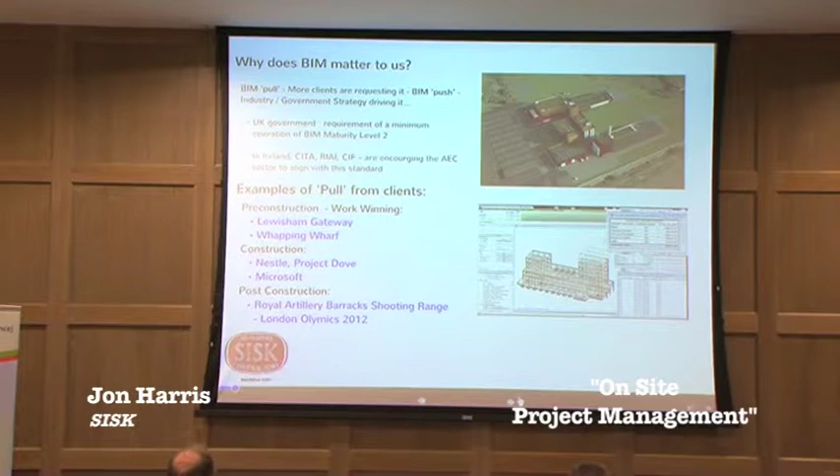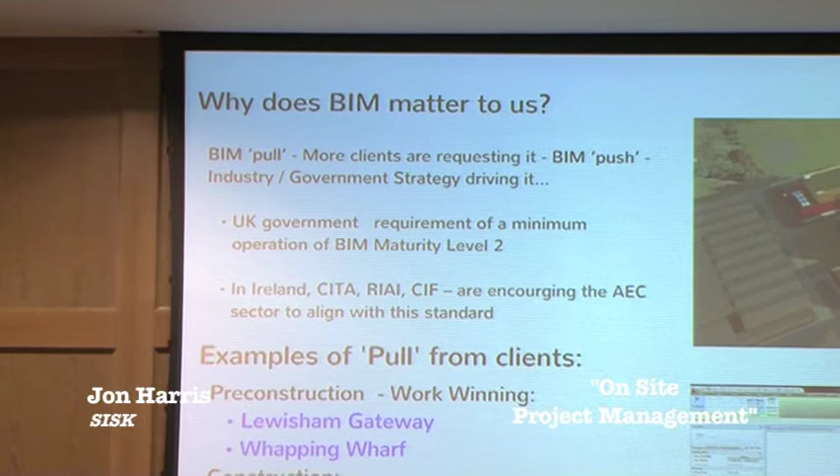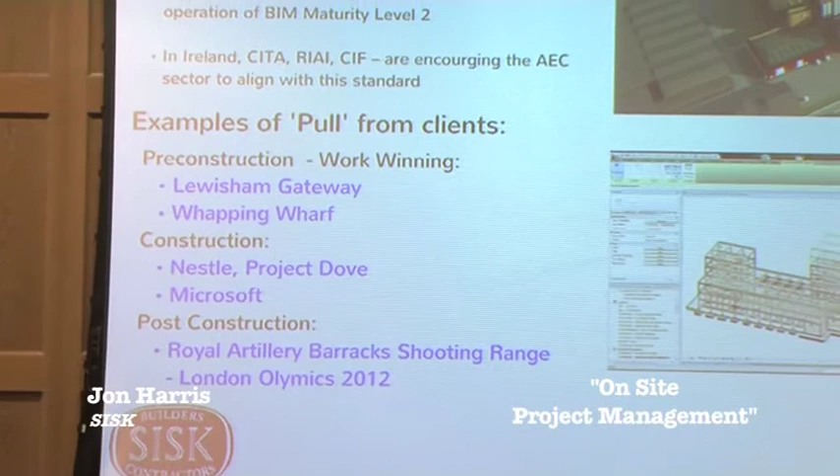So what does it actually matter to us? Andrew has talked about the push-pull, certainly in the UK. We're seeing a lot of push from the government about being at a BIM maturity level 2. There are huge advantages from that point of view, but from our point of view, we're also getting it from clients that are expecting it. From a contractor's point of view, BIM is actually a process that boosts efficiency and value, and that's what we're looking for.

Money's tight, tenders are difficult, so we're going to focus on some projects here, certainly from a pre-construction point of view, which we've won in the last couple of weeks, so they're fairly fresh, through to some that are actually running at the moment. They're both big BIM and little BIM, so it's looking at different sizes. It's quite useful to look at that.

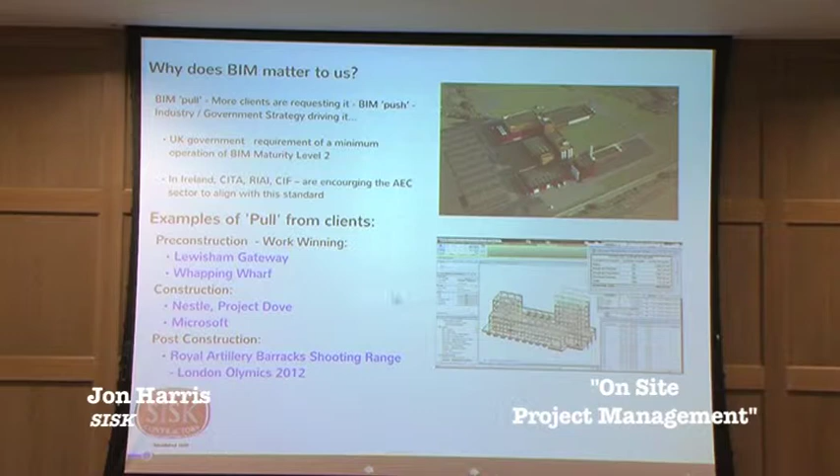And then looking right at the end, you'll probably recognise it - the Olympics, where we did temporary buildings, and BIM was actually used on that building. So if I ask John to look at this.

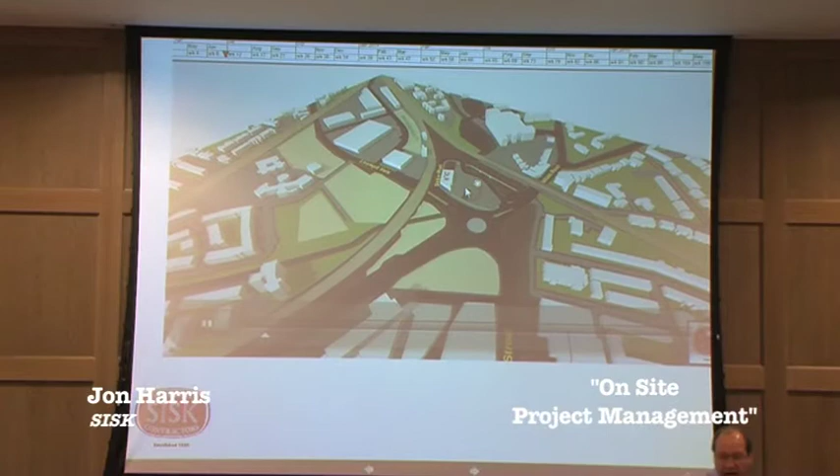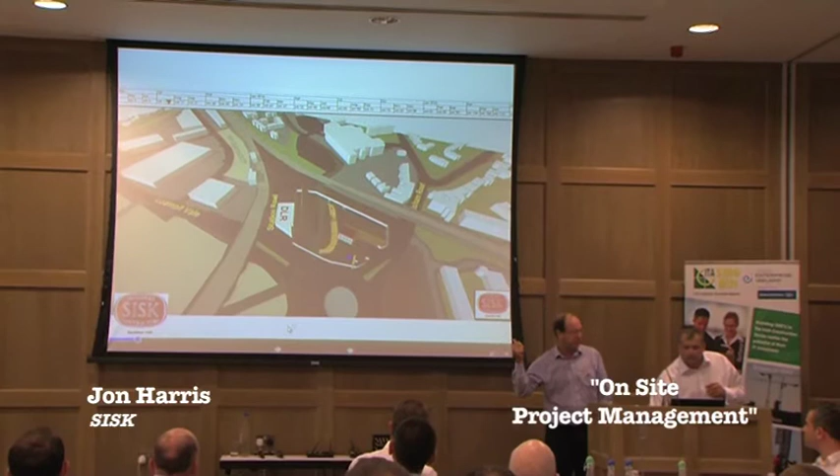This is a project we recently tendered on, and we used Synchro. I'm talking more from the 4D perspective here than anything else. If we didn't have Synchro, we probably wouldn't have got this job. It enabled us to see things which we wouldn't have normally picked up. What you're seeing here is a CGI graphic developed from Synchro, tied into our program. We were able to adapt our program. There's some quite intricate enabling works, which for a builder, we would normally not have seen.

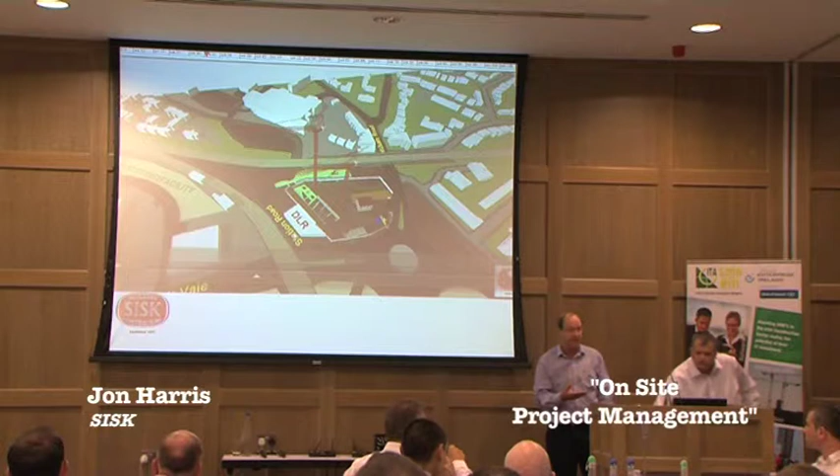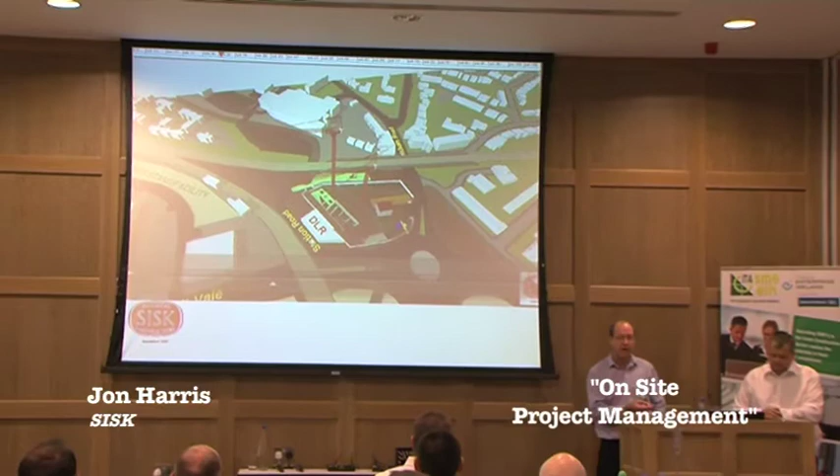River diversions - just having the facility of Synchro there. If you stop there, you can see to the right of the building there are two rivers that needed to be diverted. Synchro enabled us to look at that, to resequence, to rephase, and to recast. On top of that, it also enabled us to demonstrate to the client and give the client confidence in knowing how we were going about it. The Environment Agency was a key factor in this - this is in the middle of London. Again, these tools, Synchro, gave us the ability to take it that step forward.

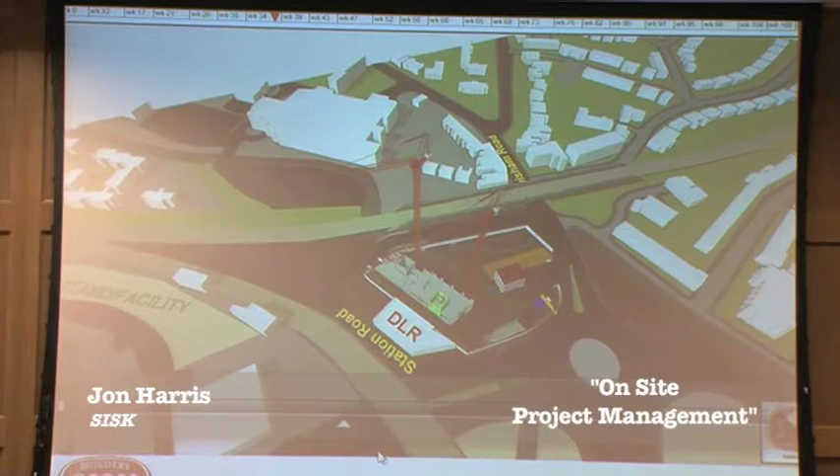I don't think we need to go into more on that. It's part of the first phase, which was won in the last couple of weeks or so. So it's about work winning.

Also, the thing I quite like about Synchro is it dynamically links to the model. If the model's available at that stage, fantastic. Sometimes it is available, and in this particular case we could use the structural model, taking it from the consultant and developing it further. You need to add to it things like site setup, site welfare, logistics phasing, and those sorts of things. So it's a very good tool. But the good thing about it is it's not throwaway, not just a pretty animation - it dynamically links to your scheduling software, so it'll link to Primavera, and to the standard tools we tend to use, which is Asta Powerproject. So it's a very good tool, and it links against a timeline.

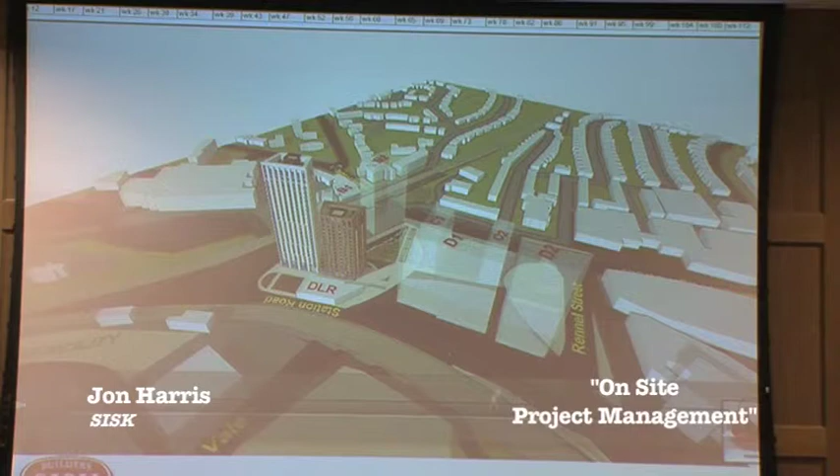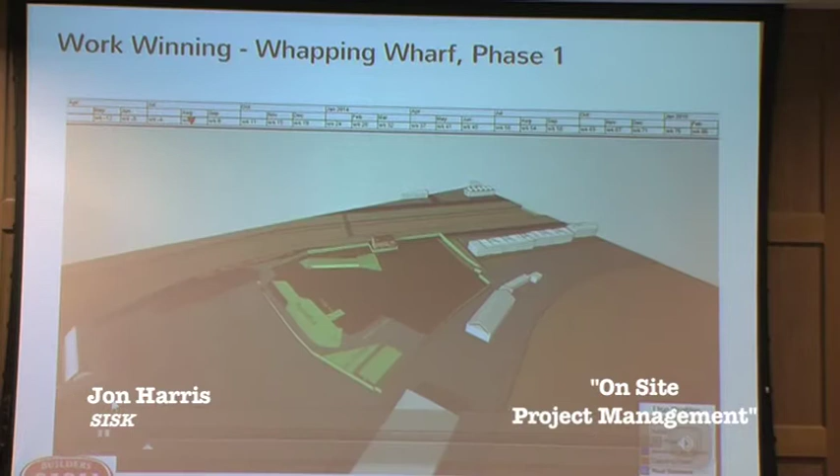Moving on from that, I'll move on to another project we've literally just won. This particular project is in Bristol, in the UK. It's a mixed housing development, 204 apartments. Again, at the tender stage, to help us win the project, we produced a lot of site visits to actually understand the actual site setup. Just stopping it there.

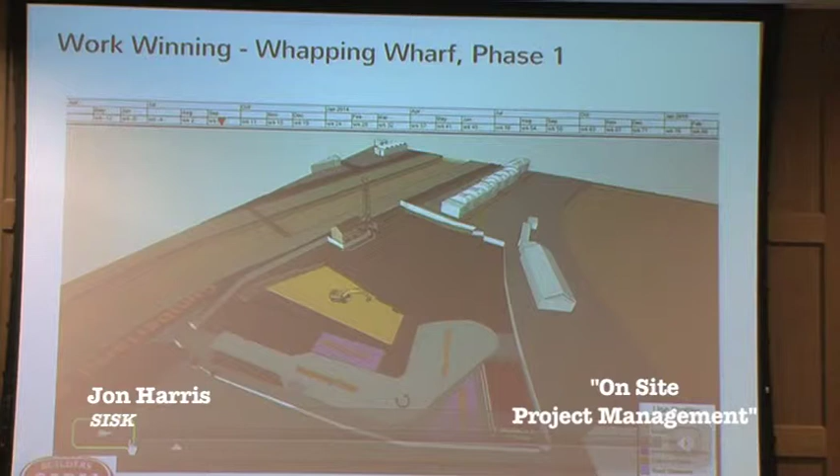We needed to actually understand the egress, being in the centre of the city, and the lots of problems from a delivery point of view, understanding third party. If you look, I need to maybe use a laser, I think.

Both on these sides here, this little bit here is actually known as the Cut, which was a man-made river. It was built in 1804 to 1809. And this is actually a floating harbour. There's also a railway that runs along here.

So from a site investigation point of view, lots of issues around third parties, around boundaries, about logistics. So we needed to be able to actually play that back, which enabled us to understand the movement from here.

There's a bridge that's used quite a lot here from a pedestrian point of view, and this is very, very active - it was an existing car park. This is a museum along the side here, but also things like plant and cranage from a site setup. There is actually quite a nice story about that Cut.

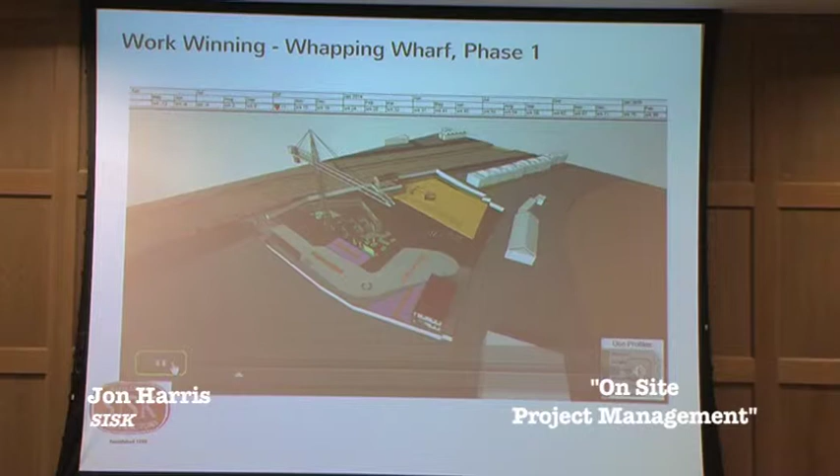It was built in 1804 to 1809, took about 5 years to build, 3.5 miles, built by Irish navvies and English navvies. And they actually had a party when they finished it.

They actually had, I think it was 2 oxen and loads of potatoes and 600 weight of plum pudding. But also every man had a gallon of beer, strong beer. But what actually happened is the beer ran out and it ended up in a punch-up.

So then the press gang came in and had to sort them out. But we actually use this, and it's much more simplistic - it's not like CGI, it's a simplistic, more cartoonish model, but we can simulate what's being built, what's being demolished, the actual site setup, the site welfare, the boundaries, and traffic movement and so forth. It's a very, very useful tool that we actually use.

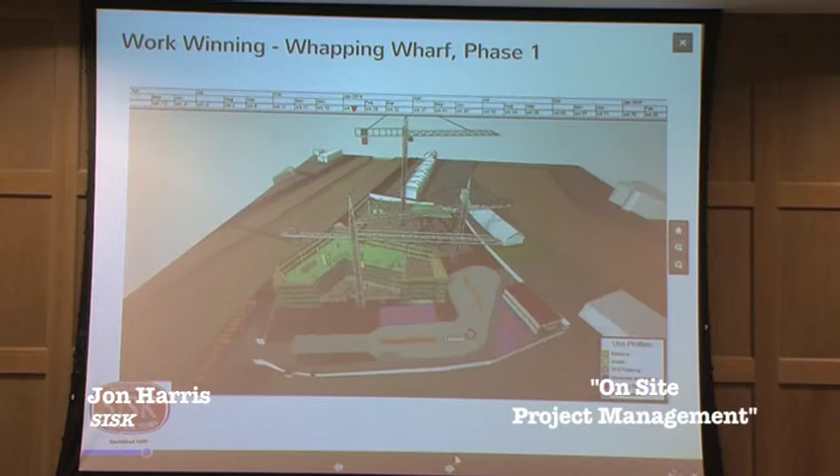Moving on to another project, again at a tender stage. I'll just zoom into this little bit. Excuse me, moving around a little bit. This is a CGI. This is Nestle.

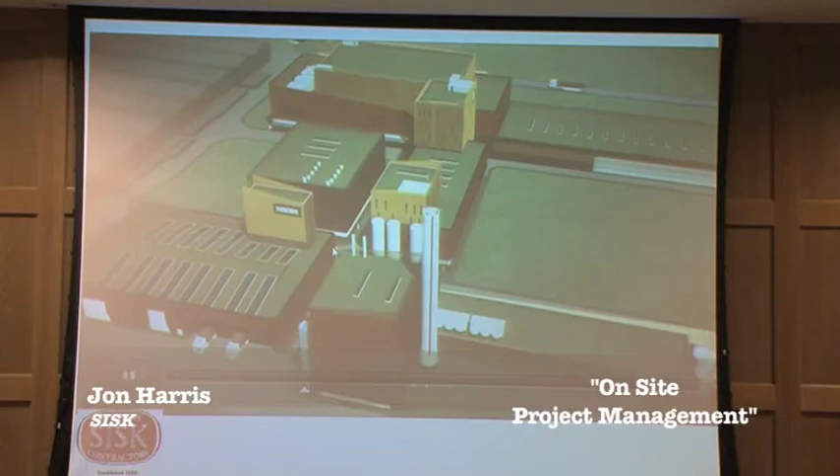It's probably one of their largest projects. They've got a £500 million framework. This is £250 million worth of it - 16 different buildings, both industrial, process design. It's a big extension to an existing factory that's been there for 100 years.

Now, when we first rolled up, great, fantastic, everybody's engaged, but it's a different type - it does depend on your procurement routes. In this particular case, it was a 2-stage traditional tender. The design team were not novated to us, but we had 16 different packages that we, as a contractor, needed to control the design.

And they were using just an FTP site to collaborate this information. Great, the fact that they were doing things in 3D. But right from the word go, we actually used BIM from a concept stage.

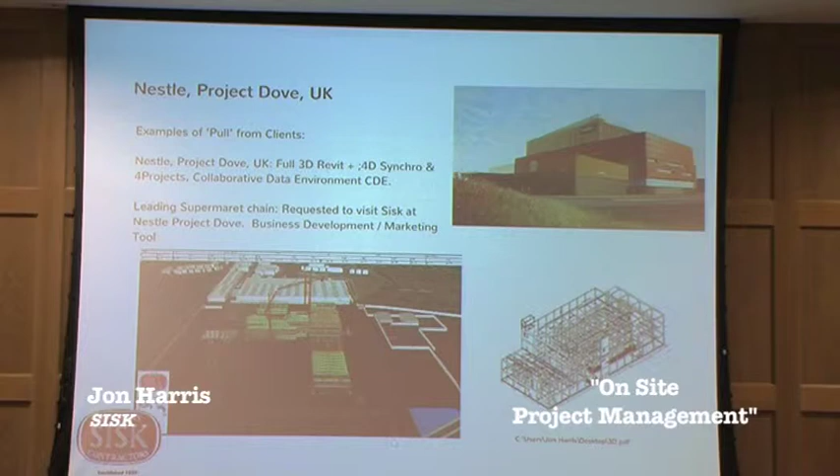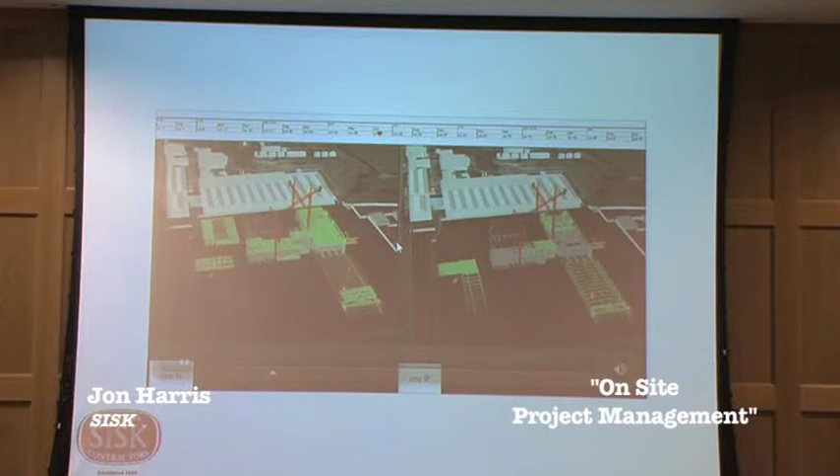Great, fantastic - Andy's talked about using programs and so forth. What we actually use on site is to compare the contract program that we've agreed against where we are from a design point of view. So we might be held up from a design point of view, but the client constantly changed.

Since we started, in September last year, 1,200 changes - constantly changing all the time. So very, very complex, and you need to be able to manage that.

You don't necessarily want to sit there as a contractor and say, thank you very much, new variation can I have please, because that's really not the right sort of approach. You want to be looking at value engineering, you want to be looking at giving the best value and efficiency.

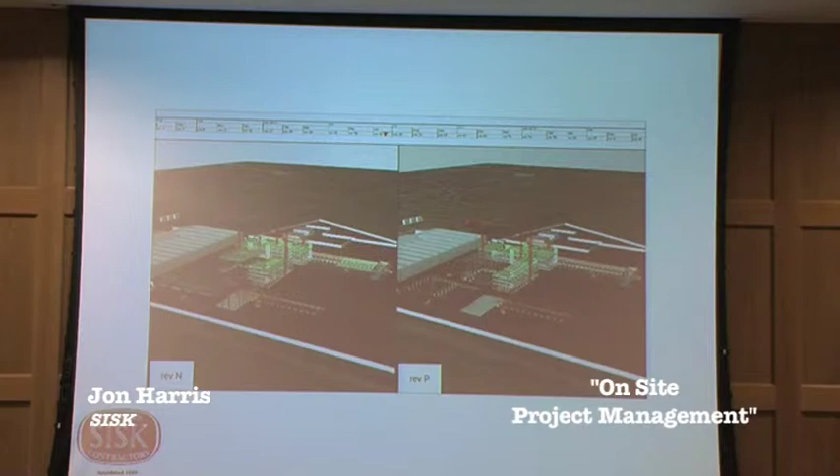But we can actually take certain parts, focus on them, and it's dynamically linked to the program. So the program controls the thing - it's not done in isolation, it controls the design, so you end up with a design, procure, and construct program. Even though the designers are not novated to us, they're all working in BIM.

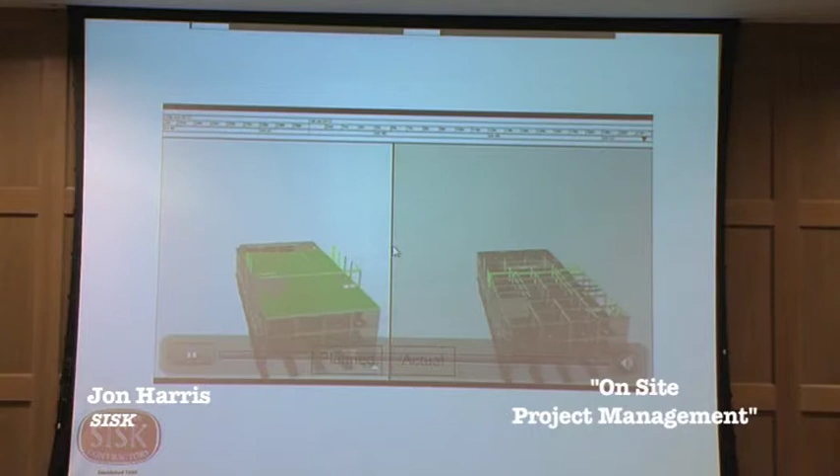And I think having to set up, where they were using an FTP site, sharing of information is very important, and collaboration is very important. But this is a very good tool to show, well, that's where we're meant to be, and here is actually where we are.

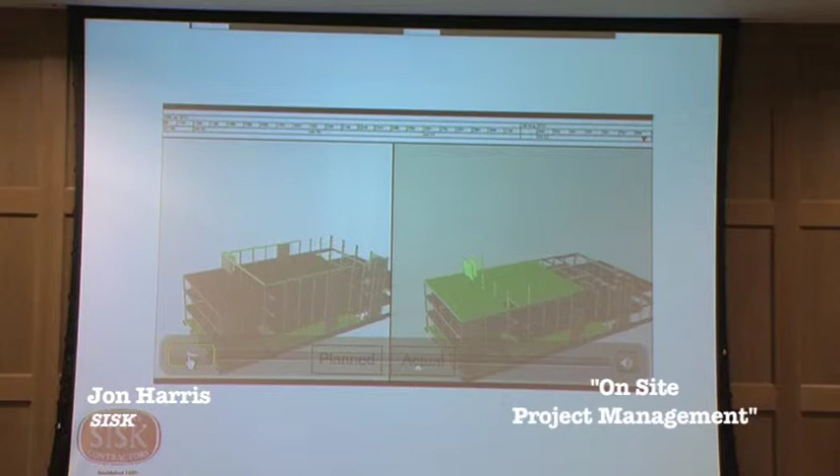Because the design has been held up, or there's all these changes, you now decided to move this piece of plant. Very complicated because you've got 16 different teams, but they're worldwide. Russia, Sweden, Switzerland, all different places.

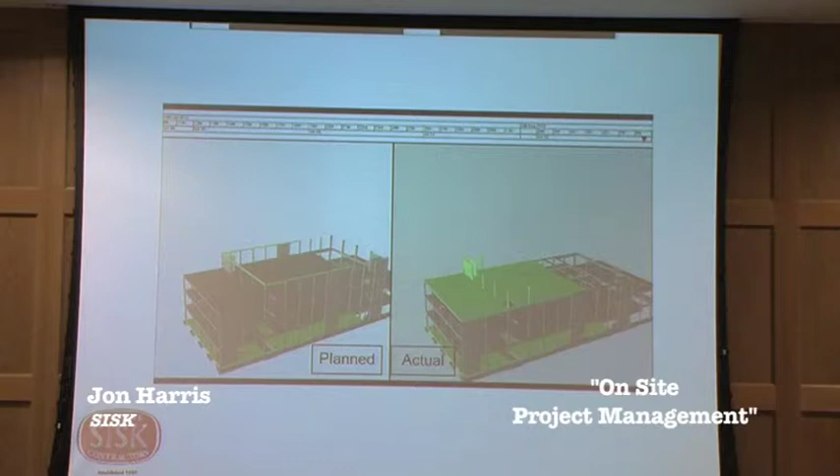So one thing that we actually brought to the table, we think, when we've actually set this up, from a global point of view, from an enterprise, is we actually believe in having a collaborative project.

So to help that, I suppose it's the olive leaf, we'll actually train the whole team, at a cost to ourselves, to train the designers.

A lot of designers are used to these tools. They use all different sorts, whether it's Asite, whether it's Buzzsaw, but we actually offer this as a value proposition to say we can host this information, we can share this information, so we end up with simplified communication.

One version of the truth, we say automatic compliance, somewhere in an online collaborative environment, which is quite important around things like PAS 1192 and those sorts of things, to actually have somewhere where you control that information so that you're working to the right information at the right time.

One thing that we did as well around change control, which you need to keep on top of, because 1,200 different changes, it's complicated. The original process, they actually had just this sort of flow chart that if there's a change, this is what they do.

It's a sort of paper chase. You need to be able to actually look at that. They have a standard form, they have their processes, they don't want to move away from it, but they would fill in a form, they would do it manually.

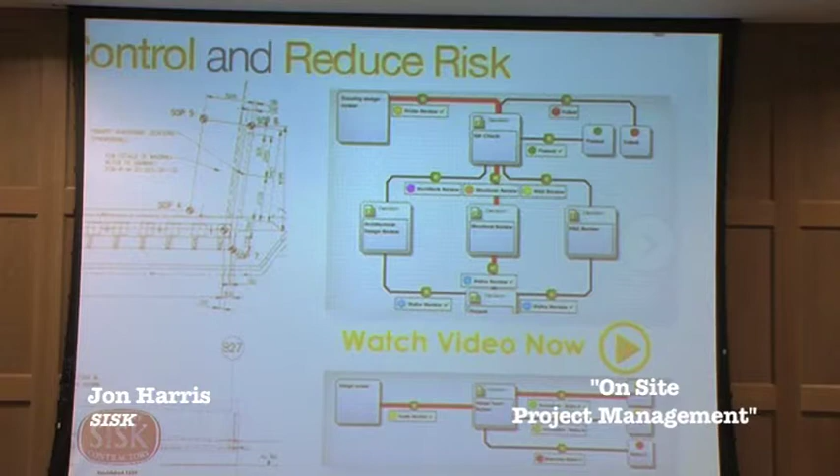So advancements of moving from an FTP site to a collaborative environment.

The other things as well, we talked about sort of, Andy was talking about mobile technology. Yes, smartphones, people do a lot of things on smartphones and tablets and things like that out in the field itself.

Certainly, we want to be in a position where we can actually go out and see that information in real time. Mobile technology is improving all the time, but the ability to actually go out, visualize that information.

Maybe send an RFI, or take a snapshot, a photo if I'm doing snagging or something, and it goes in, it will create an automatic audit and send it to the right sort of people. So you speed up that efficiency and that process.

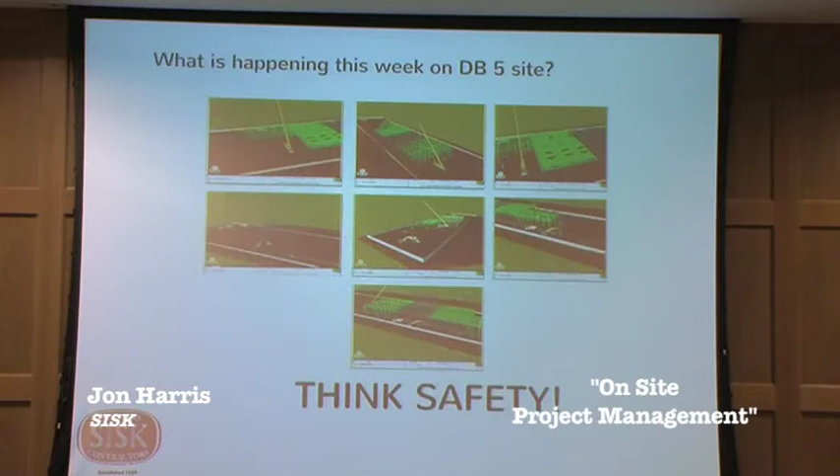Not enough time to really go into this, but this is something else we're looking at from an O&M perspective. There's a request for the BIM model at the end, but what is that? Is it a collection of information, one big Revit model, IFCs, something based around COBie? I think that's evolving, but it's a collection of information associated with the project. If you look at PAS 1192, you need to understand the employer's information requirements and set that early in a BIM execution plan to get you where you need to get to. I think John's going to talk about this one.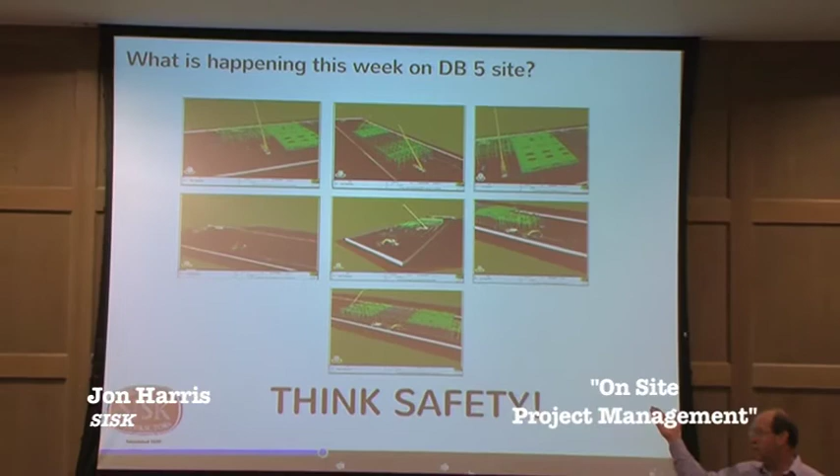Making use of the tools available using Synchro, on this particular project we take the contractors on a weekly basis and run them through the look ahead for the week. We look out for items where we're going to have potential clashes, where plant is going to be running, so people are well aware of it. These are tools we probably never had before, which can be shown graphically to people on site, giving a major benefit from a health and safety perspective.

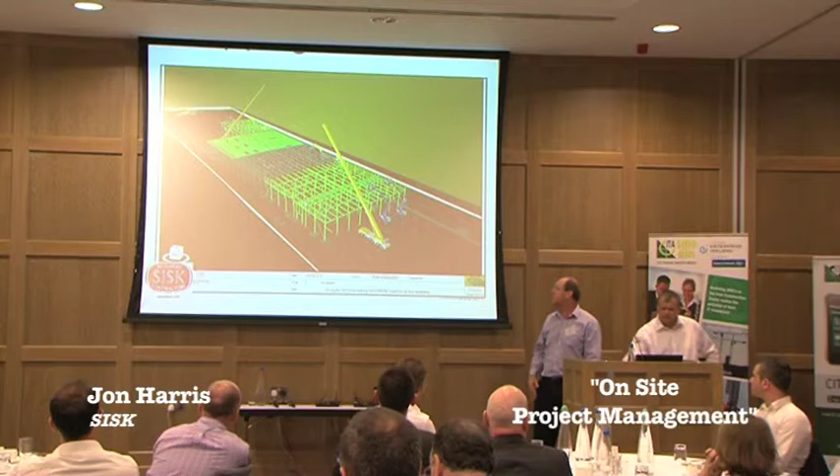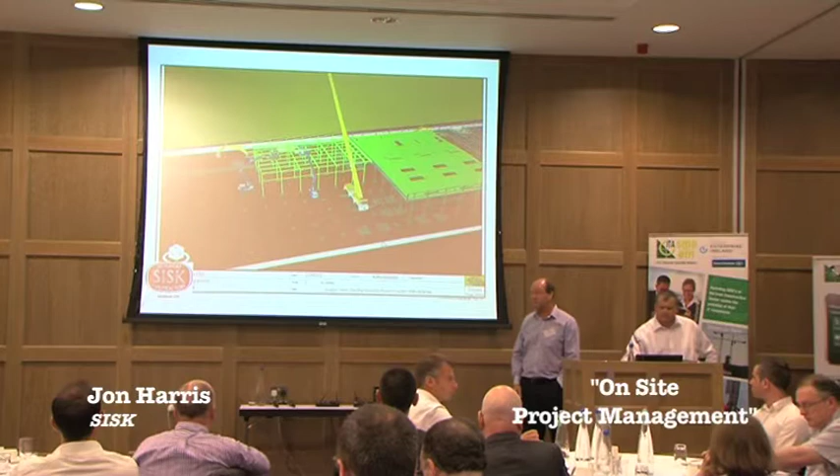This is probably something John has touched on as well, Andrew - running through look-aheads in your work programming, location of cranes, how different contractors are going to be interfacing with each other. These tools are now available using Synchro in this instance, which were never really available before.

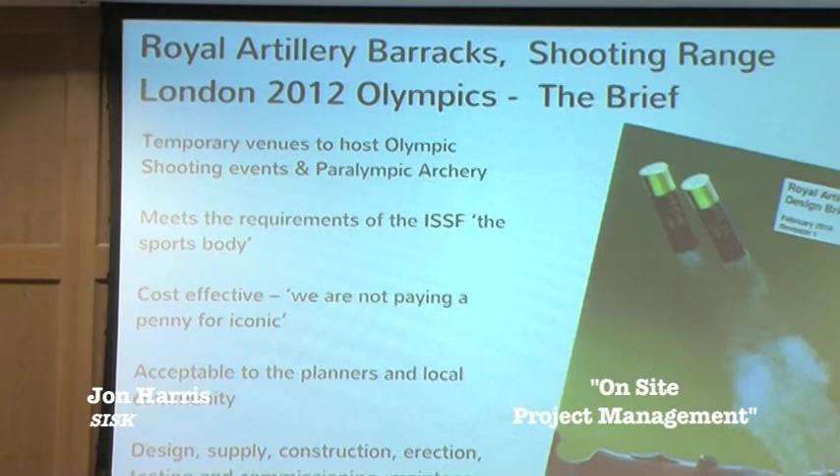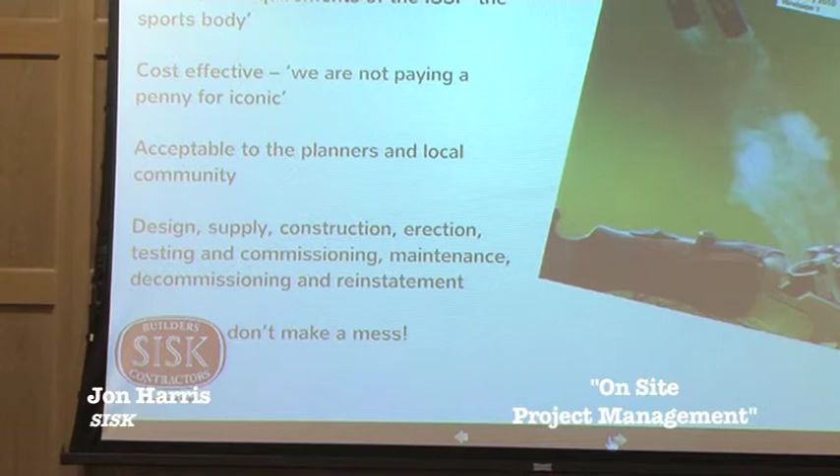So, to sum up, I'll end on a project where we were the main contractor. This is quite a unique one, iconic, but not iconic, because the client didn't want it to be iconic - they didn't want to spend the money. They wanted something cost effective. This was the Royal Artillery Barracks, the shooting range where they did rifle, shotgun, pistol shooting, archery for the Paralympics. They didn't want to pay a penny for iconic, but the rules around this were to minimise the use of virgin materials, reuse, recycle at the end, and reinstate back to a greenfield site in a cost-effective way - a bit unusual. Don't make a mess, that's where they were coming from as a client, from an ODA point of view. I thought the consultants on this job were absolutely fantastic.

Mott MacDonald, the architect was Magma, and it was based around almost like the sort of military heritage around bivouac and tents in a field as the approach.

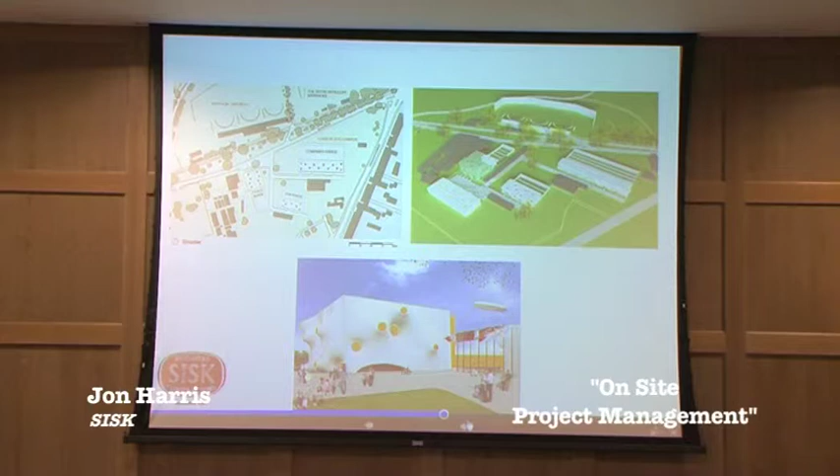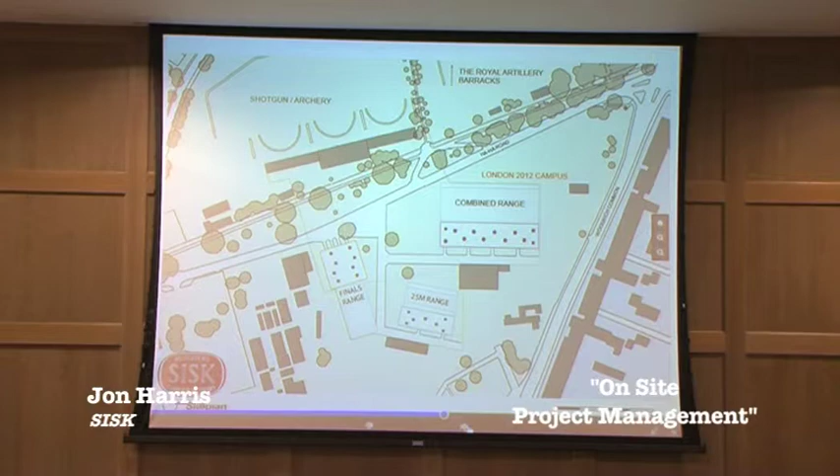Then focusing on value for money - originally you had 4 buildings, and the design team took those 4 buildings and said we don't need this, let's reduce the footprint. They amalgamated 2 of the 4 into one building and reduced the footprint by 25%, which means 25% less cost, less materials and so forth. They ended up with a solution based on 3 main parts of the building.

Looking at a few of the buildings - quite unusual, temporary structure. They tried to use standard trusses, standard columns. The only bespoke part of this was some of the connections in the corners. In fact, the structure used here was actually used by Madonna afterwards in one of her concerts - or before that, actually, before that.

Moving on from this, looking at what they call the Olympic rings - they had a multi-purpose role. Their purpose was to tension the outside fabric. The fabric was PVC, again recyclable, with good durability, good tensile strength, good thermal properties. It was also about creating no flat spots, so rain wouldn't catch and pool.

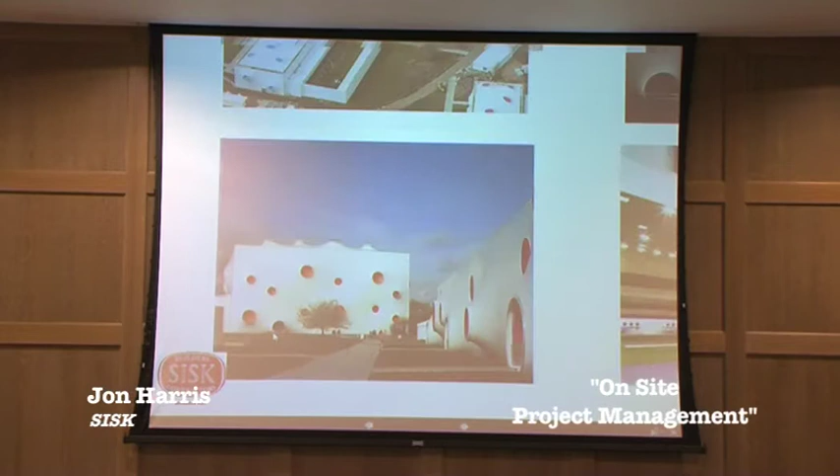I think this is probably a better picture. So you wouldn't get those sort of flat spots to collect rain, but also the flapping sounds that you get, maybe distracting when you don't want that happening if somebody's shooting a rifle, I suppose.

But also, you know, natural ventilation, the typical sort of stack effect - we're trying to use that. It was double skinned, so we could use that double skin to actually run services and cables through, which was quite useful.

And also inside, they looked at the ballistics, which is quite interesting - a simple use of plywood, so you can see these sort of baffle-shaped things. This is supposed to prevent ricochets from a ballistic analysis point of view.

Again, using the model so that you can actually take the model, optimize it from a manufacturing, from an assembly point of view, simulate the construction. So from a concept stage, they embraced BIM, and we'll have a little look at some of those workflows and lessons learned.

Just looking at this, more sort of simplistic from a design team point of view - this is what they set up, this is what they were looking to do, to have a central BIM. We wanted to do the 5D cost plan, which are all the things that we tend to do, and 4D, from linking time to a program to simulate those sorts of things, but also from analysis.

So they set out right from the word go - quite admirable, even before we engaged - but they brought us in at a very, very early stage.

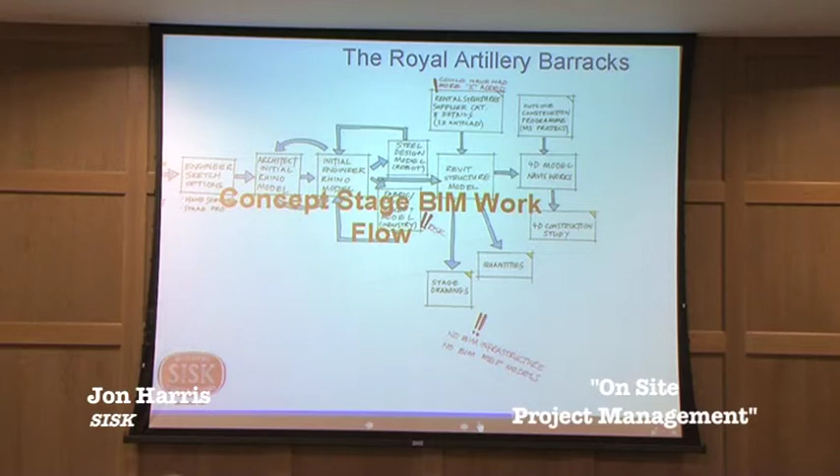So looking at the workflows, from a process mapping point of view, but from an engineering point of view, yes, you start off with hand sketches. The architect was using Rhino - it's not just about one piece of technology, it's about using different technology and how information flows. Yes, they were using Rhino because you've got some very, very complex shapes there, which is quite difficult to do.

Yes, they were using Revit, and things like Robot from an analysis point of view. But some of these little notes, when they went back to look at how this worked - did it work well? Not necessarily, we didn't have any MEP model at this stage, at a concept stage, but it would have been nice to have that information. We want more of the 'I', as in information, rather than just a 3D model that has no intelligence. It's quite dumb, but they still managed to use it, which was quite good.

So then moving from that into the more detailed design workflow, again looking back, there were some good things in what they were doing - a mixture of models from a thermal analysis point of view, coordinating using Navisworks, a very, very good tool that I'm sure many of us tend to use.

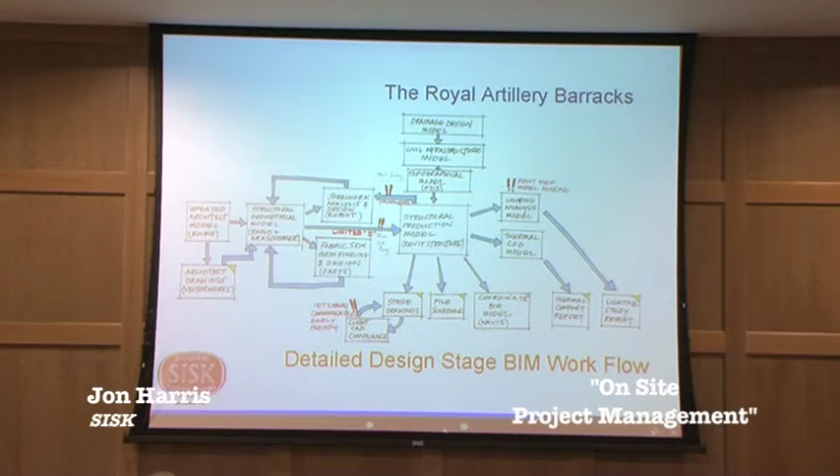But lessons learned - like the client not telling you exactly what their information requirements were. If it was available, which it wasn't at the time, if there was an execution plan, or if the client was open about what they wanted and how they wanted that information. But it's lessons learned - I think if you learn from these projects, next time maybe we should get that signed up front. It does depend on the team that you have, I suppose, really. Problems of interoperability, moving back and forth, life's never quite good.

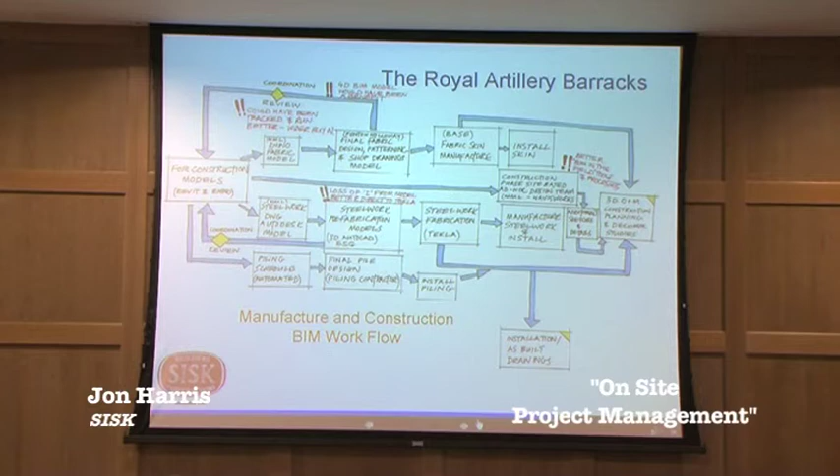And then actually going into the manufacturing workflow - worked very well. Certainly some limitations, using the model straight to manufacturing, quite important. Maybe we should have done it in certain ways, but maybe the information isn't available, and you have to work with what you actually have at that moment in time.

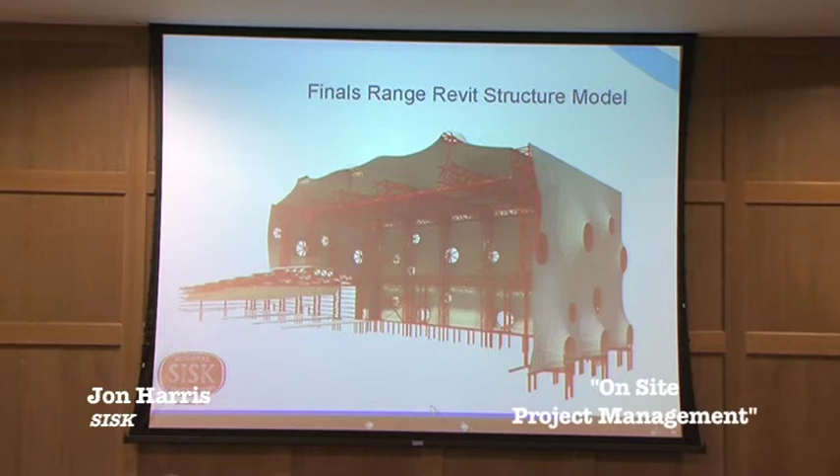And with the capability of your supply chain, which is a very important thing. It's easy to say I want it all, but the level of detail they've got to is quite commendable, really, using a mixture of different types of software.

So at the end of it, we had to put it back to a greenfield site. It's got a couple of lumps and bumps there, but it was very much around don't make a mess.

And the good thing about it is at least one person won a gold medal. This is Peter Wilson. I know the date because it's the day after my birthday, the 2nd of August. The only gold medal, I think it was the shotgun double trap. Very good guy, so it wasn't all for waste.

And then recycling, where did it all go? A lot of this can be reused, it's going to be used in Glasgow 2014. So the different setups were actually sold. We took that where we did piling, we used oil and gas pipes from piling, took them out, and we can reuse them on another project. Locally recycled plywood, again straightforward recycled, and a certain amount of buyback as well.

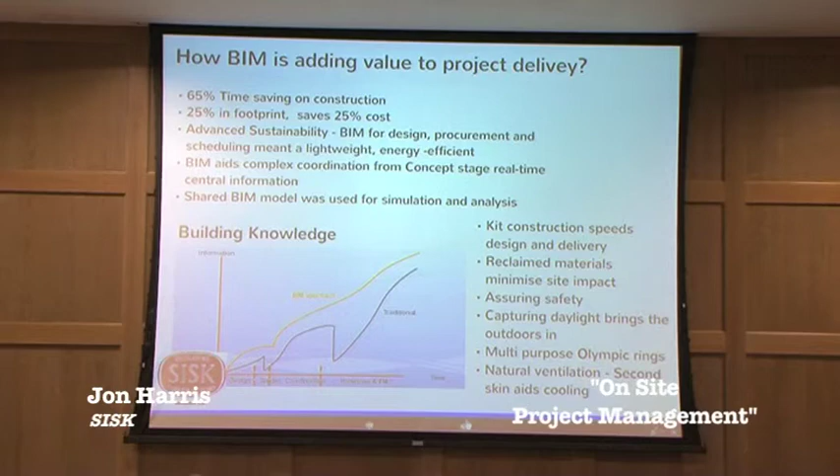And just to sum that up, we saved, we could have saved a lot more, but I think it could have even been 80%, 65% time saving on the construction, 25% on the footprint. But that's working as a collaborative team, it's not just down to the contractor. You've got to work as a team to actually get yourself there.

Advanced sustainability, reuse, recycle, work efficiently with your supply chain. Early supply chain integration is very, very important. Shared BIM model, it's not just about one piece of technology, it isn't just about technology, it is about the information, it is about the process.

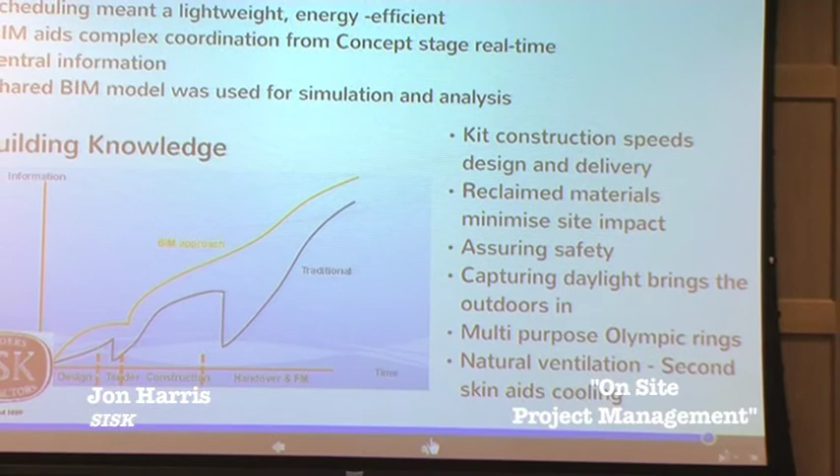Sometimes you are where you are, you have to use what you have. Kit construction, that's not just about things like DFMA, design for manufacture and assembly, it's about what can I go and get, a standard part, a standard piece of kit. I know they do that a lot with schools now, trying to develop something that can work around a grid, but I can use that as a standard kit without reinventing the wheel. Reclaimed materials, and obviously safety, safety is always very important. We don't want anybody getting hurt, during the construction or after the construction, anything going wrong there.

So lots of analysis that was actually done like that. We've all seen this graph. It's quite an aspirational thing.

I've seen it back 20 years ago where it's all about maximise information value, minimise waste. They've got this saw tooth effect. We still get it now, the design and dump, or people not wanting to share the information, but it's not as bad, sometimes it's good, sometimes it's bad. But ideally, it'd be nice at a tendering stage that yes, I've got a model, I can take that model, develop it. In some cases, like Lewisham Gateway, the client was more than happy to have that model, develop it, use it, and it's about that value of information. But you always get this sort of drop off, and I think a lot of it is about understanding.

Last but not least, so just to sum up, I think from a SISK point of view, yes, we've consolidated our approach to BIM. We've aligned ourselves group-wise with things like PAS 1192 and industry enabling tools, CIC, BIM protocols. We want a collaborative approach, and that is working as a team.

You need to have clear strategies, but I think you need to be flexible, you can't be too rigid that that's the way we're going to do it. So different types of procurement routes, different styles, different approaches, different types of contracts. We've developed our tools that will actually enable us, in an online environment, to take you through that process of developing things like BIM execution plans, both pre-contract and post-contract, so that you can actually shape what your BIM execution plan is likely to be as a team, not just from a contractor's point of view.

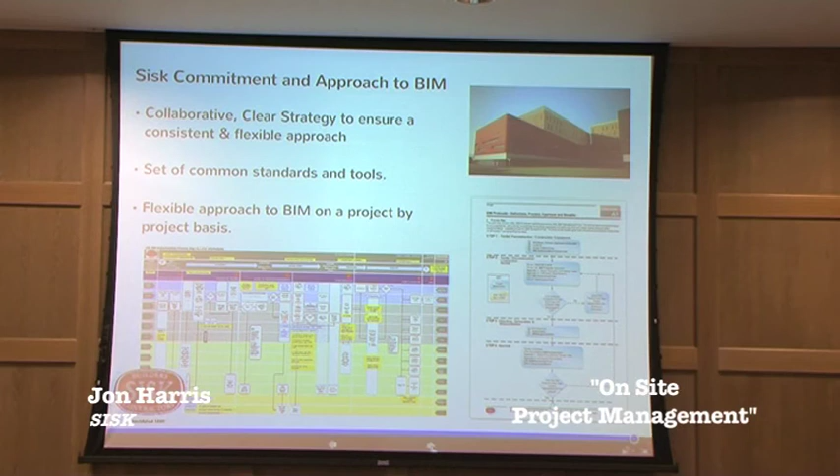But I think the approach needs to be flexible on a project-by-project basis for most of our projects. I was going to ask some questions, but I don't think I've got any time, so thank you very much.